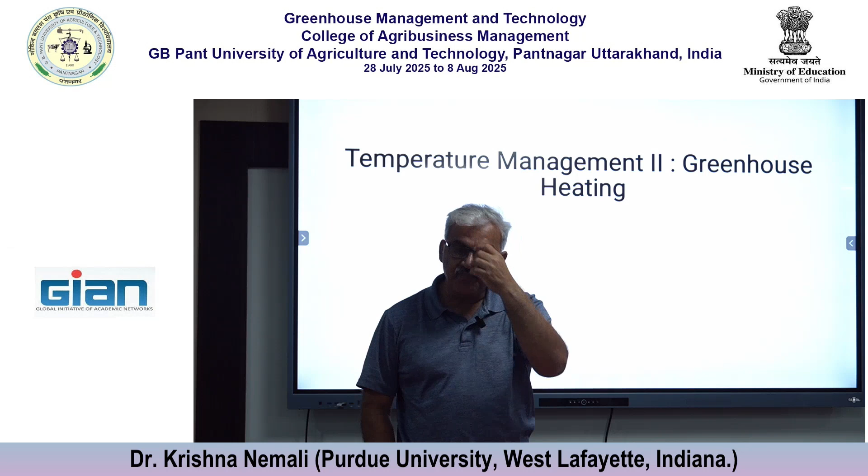Why don't you remind me the same question in the afternoon session? We might finish in the afternoon session, we may have 30 minutes, and we can talk about AI and how automation technology can really play a part. You're going to learn something, but let's park that question for the afternoon session so we can finish. I think we have everybody ready for this room, so let's start. But do ask me that.

Okay, so greenhouse heating, right? We talked about cooling. In some rare situations, you may have to heat a greenhouse, especially if you're up north, in Kashmir, let's say, or maybe in mountains and hills where it can get really cold, freezing cold, like 0 degrees Celsius in winter. I told you 25 degrees Celsius is optimum for crops.

Outside air is 0 degrees Celsius. Of course, the greenhouse will increase the temperature a little bit more than outside, but it's not going to bring it to 25 degrees. You may get 10 degrees Celsius in the greenhouse. That's not sufficient, right? 25 is what I'm trying to tell you is optimum.

So in such a situation, you may have to heat the greenhouse. If you are in an area with a lot of hilly regions and you build a greenhouse there, most likely you may have to heat it for at least a couple of months, maybe December and January, which will be pretty cold. So we're going to learn about heating. That's the reason why.

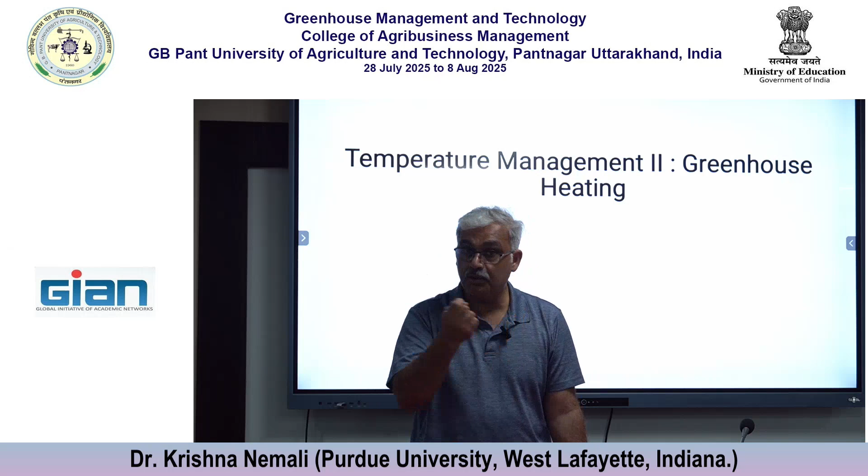But cooling is more important in India than heating. Most of the country is going to get hot, and that's why cooling is important. But we'll talk about heating, and also remind me about the humidity question you asked.

So let's look at this cartoon. Here is a greenhouse, and it's hot inside. Let's say it's 70 degrees Fahrenheit, 25 degrees Celsius, and outside it's 0 degrees Celsius, cold air outside. So the heat is going to be lost from the greenhouse to the ambient outside, because outside is colder than inside. The heat is lost through 4 methods: conduction, convection, radiation, and infiltration.

Now let's talk about them. Let's talk about convection. Convection is heat transfer through liquids and gases, fluids. Let's say you have a greenhouse, this is a warmer region and that's a colder region. The air is going to carry the heat from the warmer region to the colder region through convection, through gas, air. With time, everything becomes equalized. If you have a hot and a cold pocket, with time they all become similar. That is happening due to convection.

I told you the hot air rises up in a greenhouse. That's convection, natural convection, right? Hot air rises up.

There's an example. Let's say this is hot air here, and here is your greenhouse cover, the wall. The hot air comes in contact with the greenhouse cover. The cover is a solid material like polythene, glass, or polycarbonate. That material picks up the heat from the air, and then either the glass or polythene transfers the heat through the solid material to the outside. That is conduction.

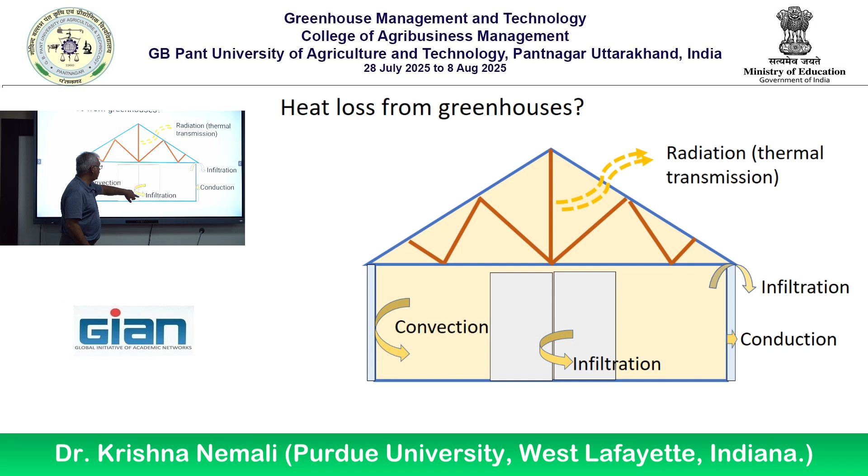So then the question comes: okay, we have to heat greenhouses. How much heat is needed? How much is it going to cost me? All of that - you can do mathematical calculations even for that.

So this rule of thumb is simple. How much heat is required? Heat required is equal to heat lost. I told you that heat is lost by 4 methods. What are those 4 methods?

Infiltration - if you can measure the total amount of heat lost by all these 4 methods, that's the heat lost, and you add back that heat lost to keep the temperature. So the temperature is 70, but these 4 methods made the heat go away from the greenhouse. So you know how much heat has been lost, you add back the heat, then you maintain 70. So heat required equals heat lost.

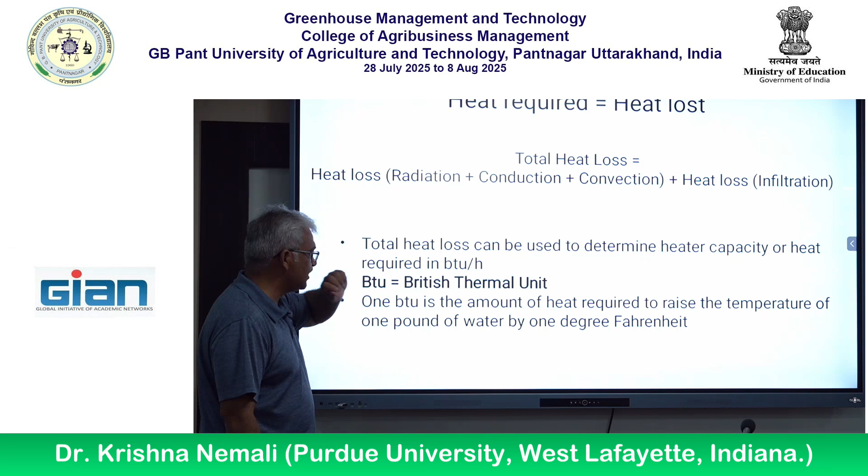Simple. So now we're going to do a simple calculation. Total heat loss coming from radiation, conduction, convection plus infiltration can be determined by a simple formula. Don't worry about this, I think this is an older slide deck. Yeah, let's get to here. I think this is where I got it.

So the total heat loss from all those 4 methods is Q. Let's say it's Q. All those 4 methods - conduction, convection, radiation, infiltration - is given by Q equals U times A times W times Ti minus To. It's a very simple formula, by the way. I'll explain everything slowly, but remember Q is the total heat loss. Once you know the heat loss, you know how much heat is required, right? So we are calculating heat loss as U times A times W times Ti minus To.

So what are these different letters? Let's start with Q. We know Q as total heat loss or heat required, in watts. U is the heat transfer coefficient.

Every material - polyethylene, glass or polycarbonate, whatever you use to cover the greenhouse - has a certain property. One of those is that heat transfer coefficient. That material is going to transfer these many watts of heat per meter square for a degree Celsius difference between inside and outside. That's what that means.

But you get these numbers - these are easy numbers, you get these numbers, you take that number and simply plug in there. You see here, U values - I've given you U values for glass, polyethylene, polycarbonate. So if your greenhouse is a polyethylene greenhouse, what do you take? 6.5. You take 6.5 and you put 6.5 here for U. Okay, that's easy.

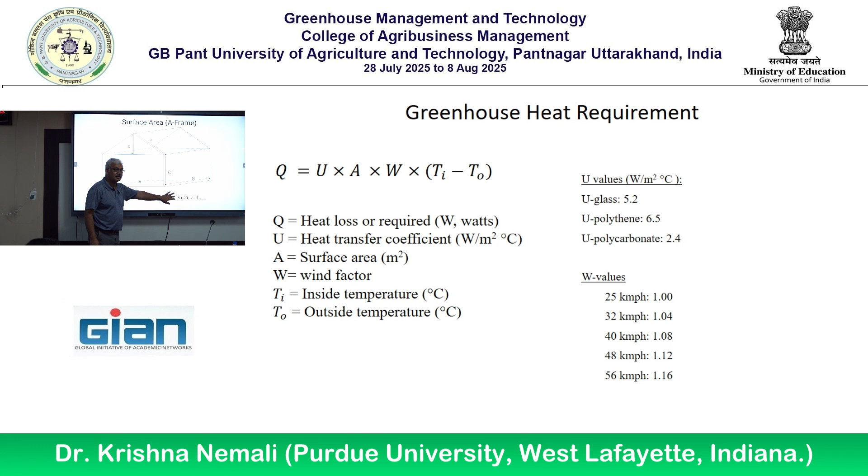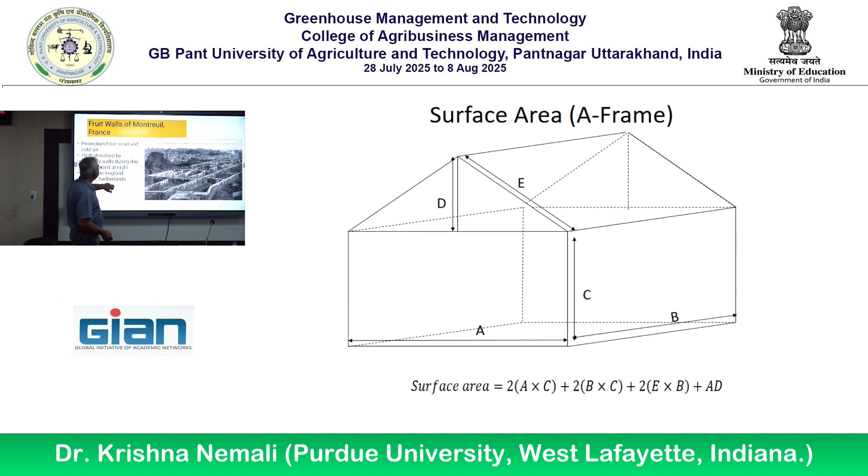I just want to move on. This isn't that important, but what I want to get to is this one. I know there's something wrong with it, but we'll get to that. In any case, this is how you heat a greenhouse.

Now you know how much heat you need. So why do you need to do that calculation? This is called a unit heater. You buy this from companies, and when you go to them and ask for a unit heater, they will ask you what the heat requirement is for your greenhouse. So you should have done your calculation beforehand, and you go to this person and say, I want a unit heater that generates this many watts of heat. So the recommendation is that...

You have to choose the worst case scenario for your situation. Meaning the TO, outside temperature, which is an important factor in that calculation, you should choose a day which has the lowest temperature for the year. Let's say January 31st is generally the lowest temperature for the entire year. You choose that temperature as the TO value, and you should choose 25 or something like that for the TI value, that's what you want to maintain inside the greenhouse. That's the worst case scenario, and then you calculate the heat requirement in watts.

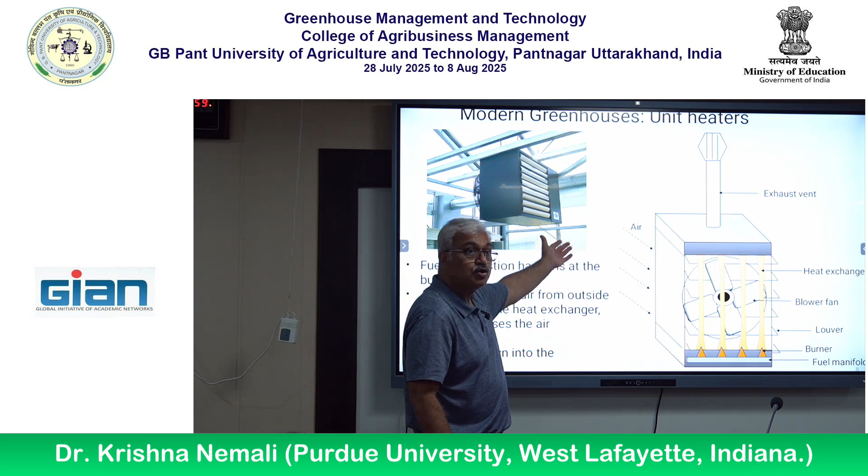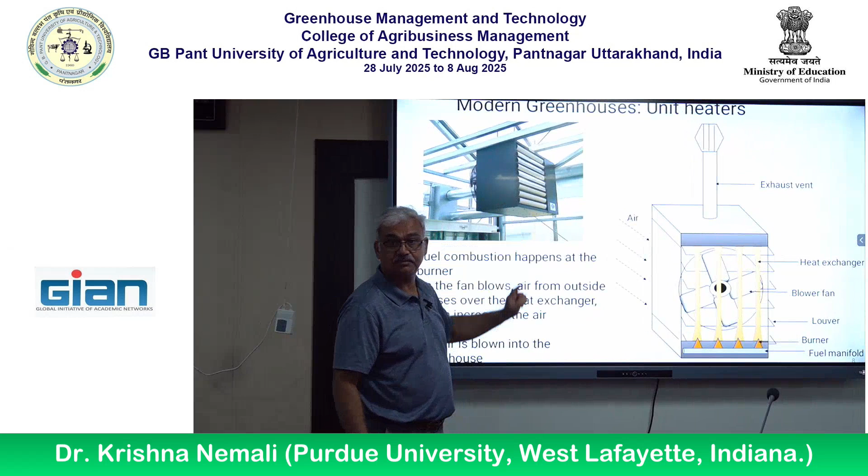You get a number, and then you go and ask the company to provide you a heater with that capacity, that many watts. Not simply something like pad area or fan capacity you've calculated - you should also calculate the heater capacity. That formula I gave you, Q equals U times A times TI minus TO, is mainly used for selecting the heater. You calculate the watts and go ask for the specific wattage.

The only consideration is that because you are buying a unit heater and this heater might stay with you for 10 years, you want to really pick the worst case scenario, the coldest day you will ever see, and that will be the TO value that you use. That way you are covered completely. There could be warmer days than that, but it's not going to go lower. So that's the reason why you should use your worst case situation for that.

So how does this heater work? The same heater, I'm showing you a cartoon here, that's how it looks. Inside you have a fan, and right below is a burner. The burner is like a stove, so we send fuel - it could be natural gas, gasoline, anything you can use. The fuel goes here, and these are burners. They flame, they light up, and the heat from the flame is sent into these heat exchanging elements. This is basically a metal rod, sort of in a line - you're looking at a transverse section, but think of it like a metal rod. The burners are there, and this entire sheet of metal is getting heated up.

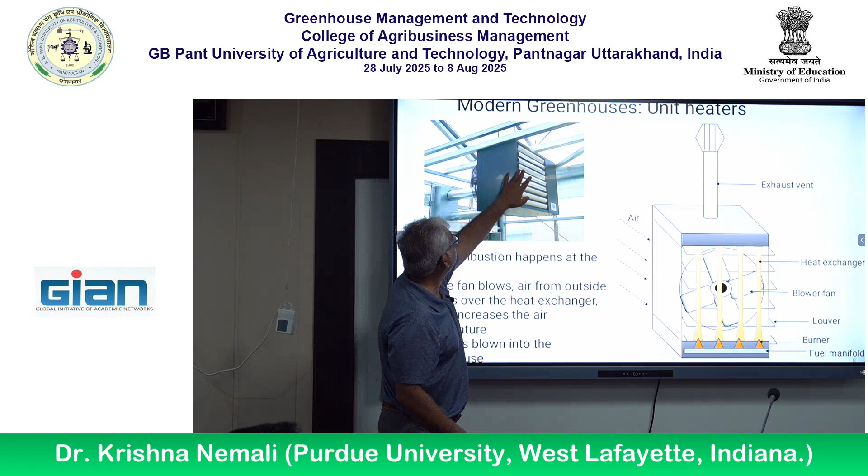The fan is pulling cold air from outside, and that air goes through these heat exchanging elements. As the air passes through them, the heat is picked up by the air, and then hot air gets into the greenhouse. Very simple mechanism, that's what this is. You see this one at the back, you see the fan here - the fan is pulling the air. Inside there is a burner element, the heat is generated inside, and hot air comes into the greenhouse. Very simple mechanism, any question on that, how that works?

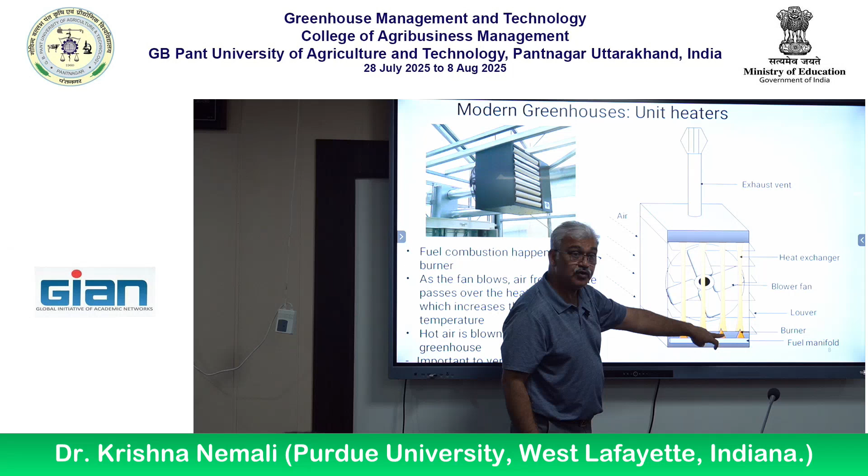The main thing is, you see this exhaust - when you are burning fuel, it's going to release a lot of gases that are not so good for plants. You have to make sure that exhaust is outside of the greenhouse. If you release that exhaust into the greenhouse, sometimes that may affect plant growth. So if you put the heater here, that exhaust should go outside, or take a tube and send it outside, not into the greenhouse. I've seen people using wood, and they burn wood to increase the heat, but with that wood, with smoke, there are a lot of other chemicals that you're releasing into the greenhouse that may not be good for plants. These are called artificially generating heat through unit heaters, and they're very common in greenhouses in northern latitudes.

So what is this louver? This is a louver, you see this? These are called louvers. They open when the fan is running, and they close automatically when the fan is not running. So louvers mean they're like fins - they open and close. When the fans come on, they automatically open, so the air goes through.

And the fan is turned off, they close. Okay, so what about the oil-filled radiators, which are also available in the market for heating purposes?

This will generally affect the carbon neutrality of the greenhouse and will be polluting the environment as well. So what are the better alternatives than this?

Well, you can use electricity, but again, end of the day, it all boils down to economics. You can use coils, you can use all kinds of elements, but end of the day, it boils down to economics. If they are not going to pay off, nobody's going to invest in them.

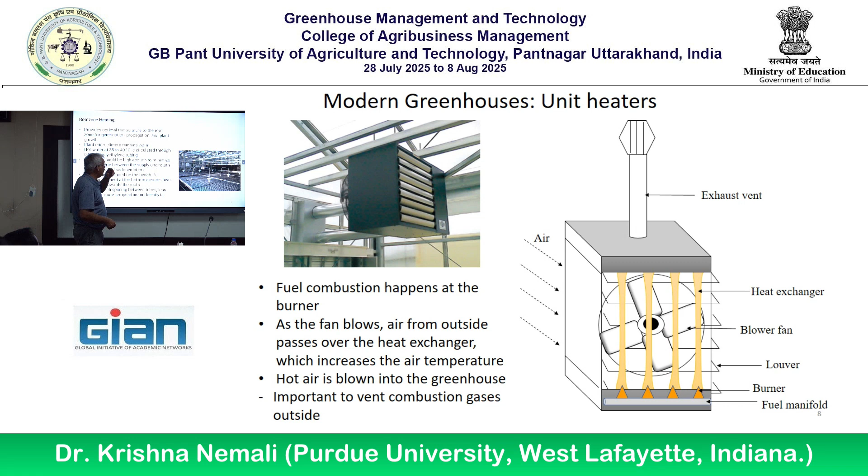So going back to your question, these are fossil fuels and we are burning them, so we are wasting, it's not good for the environment, things like that. Some other methods are there.

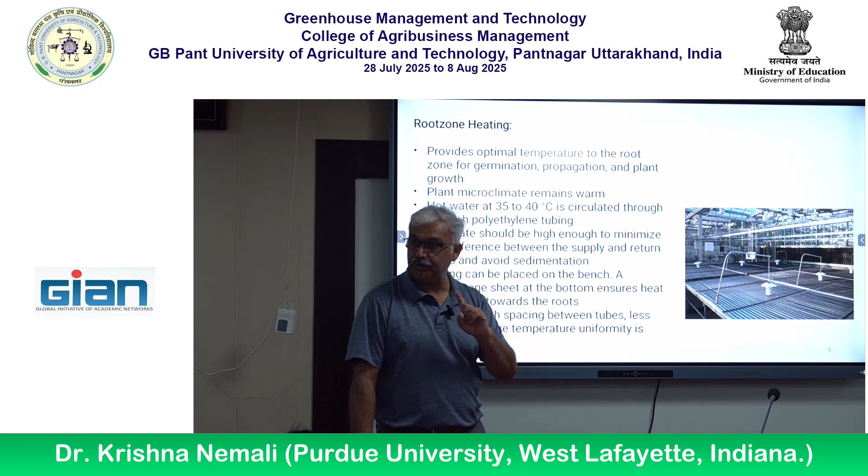So one of the methods is what we call root zone heating, bench heating. I think somebody asked about root zone heating too, right? So here is another example of root zone heating. In this case, what we do is, this is the greenhouse bench.

You can read this later, but I'm going to explain with this figure. Look at this picture, this is a greenhouse bench. We put styrofoam, what do you call styrofoam? Polystyrene is styrofoam, thermocol. That's what you call it. So those thermocol sheets are there, that's the white color material there.

Okay, and then what we do, we have these tubes. We're running hot water through those tubes. We're heating the water, but how do you heat the water? Maybe steam or maybe again natural gas, right? You can't escape from that. Okay, you may have a boiler, but you're heating water. At least you're reducing the amount of heat you will use in this case.

We run hot water and then we put plants on top of that. So what's happening is the heat energy is coming out of these tubes. It is bouncing back from that polystyrene, thermocol, styrofoam, and then it's getting onto the plant microclimate. So if you have small plants in pots, this system works very well.

You are not heating the greenhouse at all. You are keeping the greenhouse cooler, but you are maintaining a warm microclimate around the plant. That's enough, right? It is inconvenient to us, people who are working in the greenhouse, it will be cold inside, but maybe we're there for just 10-15 minutes. Plants are going to sit there all the time, so we just need to maintain their microclimate very well.

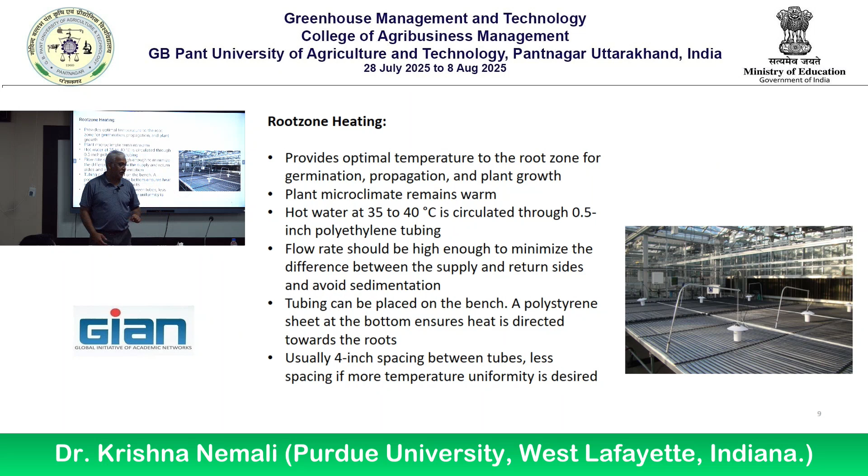That's again root zone heating. So heating the entire greenhouse is one concept using those unit heaters, but you are spending too much money on that. The entire greenhouse doesn't need to be warm. It's just that the microclimate surrounding the plant should be warm. That's what matters. So in order to achieve that microclimate heating, you can resort to root zone heating.

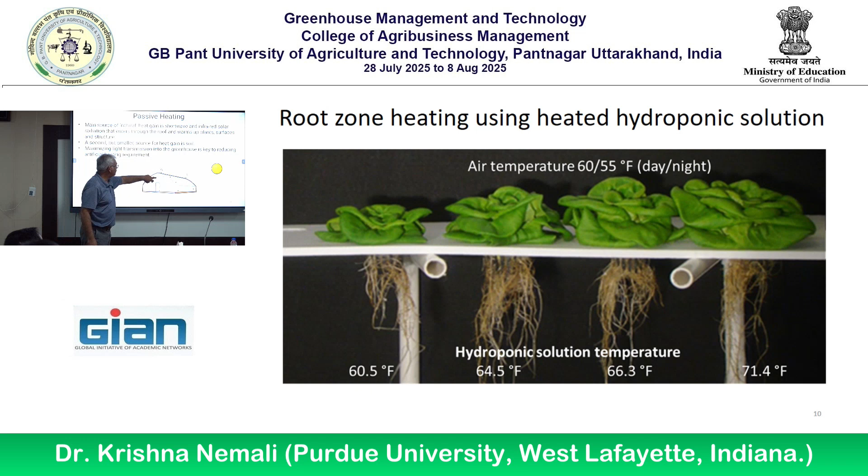I've shown you two examples: one is the water running through those tubes, and the other is in hydroponics itself. These two methods can work very well. There is another method, what we call passive heating. In this case, we are really being conservative. We don't want to burn natural gas or anything.

We don't want to burn fossil fuels, so we want to use what is naturally available. One thing is to position your greenhouse such that maximum light gets into it during the daytime. That light heats up everything and keeps the greenhouse warm for longer at night. So use the solar energy basically, and make sure the greenhouse receives maximum sunlight.

The length of the greenhouse should be in the direction of the sunlight in winter. That way most of the sunlight gets into the greenhouse and the entire greenhouse gets warmer. Here you are not investing in fuel or anything, you're just taking the naturally available sunlight. But this may be useful, but not too much.

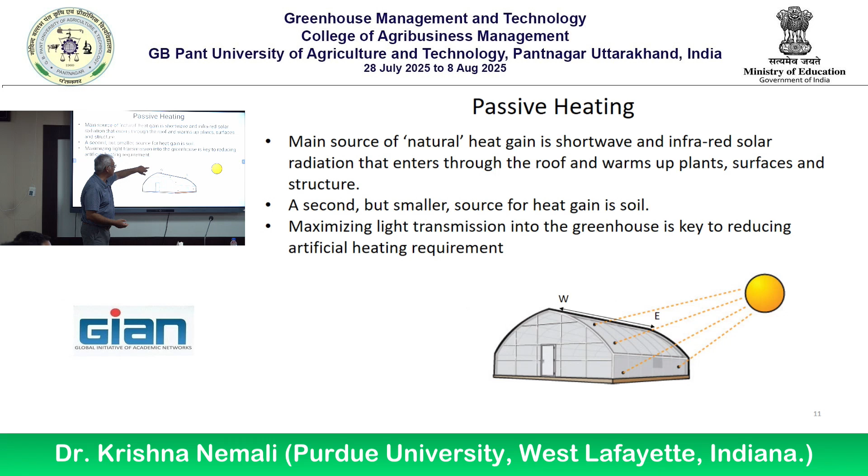So the greenhouse gets warmer during the daytime, and at night time they roll a blanket to cover the greenhouse, so the heat is not lost outside at night. They hold the heat inside. This is passive, not active - active means you're using fuel, heaters, things like that. It's a passive method, naturally using the available sun, and in doing so you are environmentally being responsible.

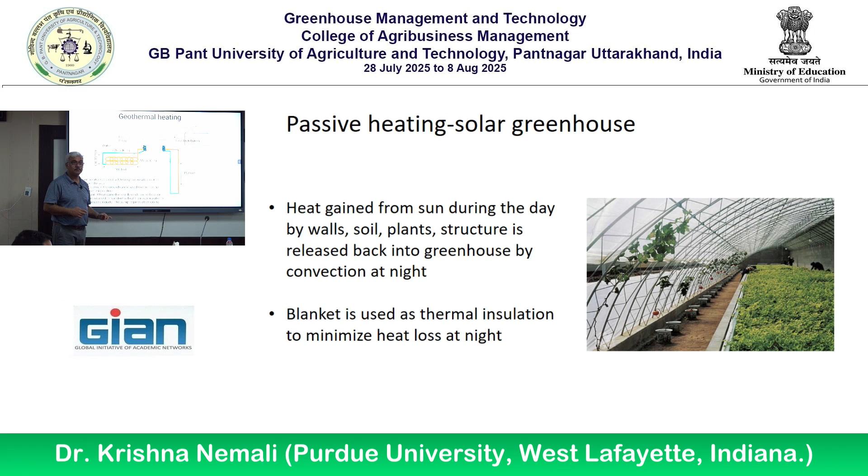There is one more method called geothermal heating. Some parts of the world, and in general, if you go deeper into the ground - for example 20 feet deeper - even in this part of the world, and measure the temperature at that depth, you will notice it remains pretty much similar throughout the year. In summer the air gets hot, in winter it goes down, but inside the ground at least 20 feet below, the temperature doesn't fluctuate like that.

It always remains similar. And what is that number? It's the average of winter and summer temperatures. So let's say in this region you have 90 degrees in summer, 50 degrees in winter. The average is 90 plus 50, 140, divided by 2, is 70 degrees. So the ground below at 20 feet will always remain close to 70 degrees Fahrenheit. Now you have a winter which is 50 degrees Fahrenheit, but the ground is at 70 degrees.

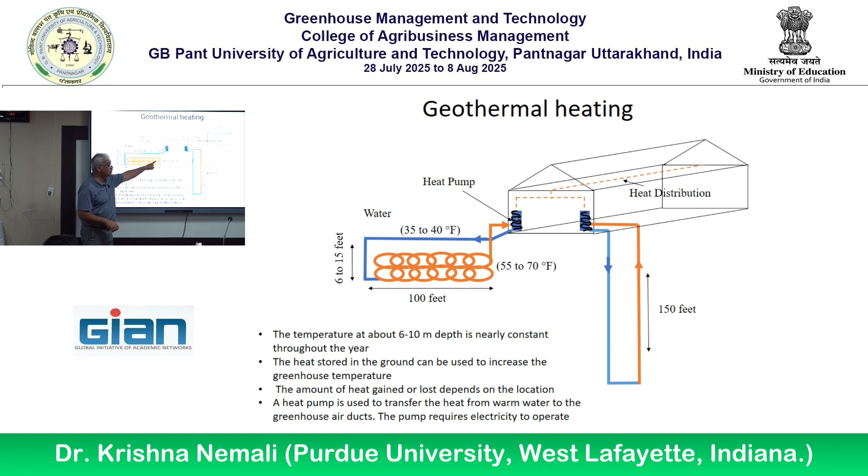Why not tap that heat? Why not pull that heat in the ground and bring it into the greenhouse? That is called geothermal heating. So what do they do for that? They dig holes around the greenhouse, put coils at 20 feet depth, and blow cold air from the greenhouse. As the air goes through those coils at 20 feet depth, the coils pick up heat from the ground, the air gets heated up, and the hot air comes back into the greenhouse.

So you're now not relying on natural gas or fuels or anything - you are tapping into the heat already stored in the ground. The other method is to go really deep into the ground, 150, 200 feet. As you go deeper and deeper, it gets hotter and hotter. So you can send a coil down, cool air goes inside, and the air coming back picks up heat from the ground, and you get hot air back into the greenhouse.

That's geothermal, basically. So you have geothermal and passive methods, which don't use natural gas and are very environmentally responsible. You've got to do some investment for that, but those methods are also being used. But for most commercial operations in the northern latitudes, heaters, unit heaters are what we use, and for that you have to burn fuel - natural gas, oils, gasoline, things like that.

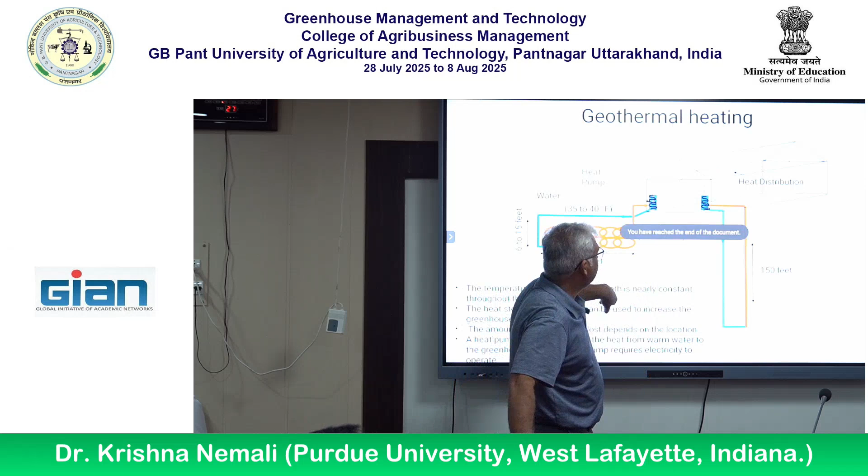I think this is the last slide. Yeah, this is the last slide. Yeah, we're right on time too.

So again, I kept the heating piece minimal, but I'll get back to your question in a second. I kept it minimal because it's probably not quite common here. The cooling is the most important thing in this area, so I want you to know everything about cooling - fan specifications, pad specifications, and considerations of where to keep fans, where to keep pads, the distance and things - all of that very important.

So remember those things, okay?

When you try to cool the greenhouses, and you asked about humidity and how to deal with that, the best way is ventilation. You have to continuously run the fans in summer, getting humid air inside because of the evaporative cooling, but you're also exhausting that humid air outside. So continuously you're venting out and bringing air from outside to inside, but that air humidity is going up at the pad area because it's getting exchanged with water. So humid air comes inside, but you're venting it out too.

So probably you will maintain whatever the humidity is outside also inside in this situation. But if the outside humidity is high and is causing a problem, you have to go for dehumidifiers. These are machines you keep in the greenhouse. They basically condense the water through cooling. When you cool something, the water condenses like rain, like when the air gets to dew point, it rains. Just like that, dehumidifiers cool the air, condense the water, collect it, and you can reuse that water. This option is there, but it's not common in greenhouses, it's more common in vertical farms, indoor farms. I've seen companies use these dehumidifiers to cool the air and condense the water out, because inside a building it can get really humid.

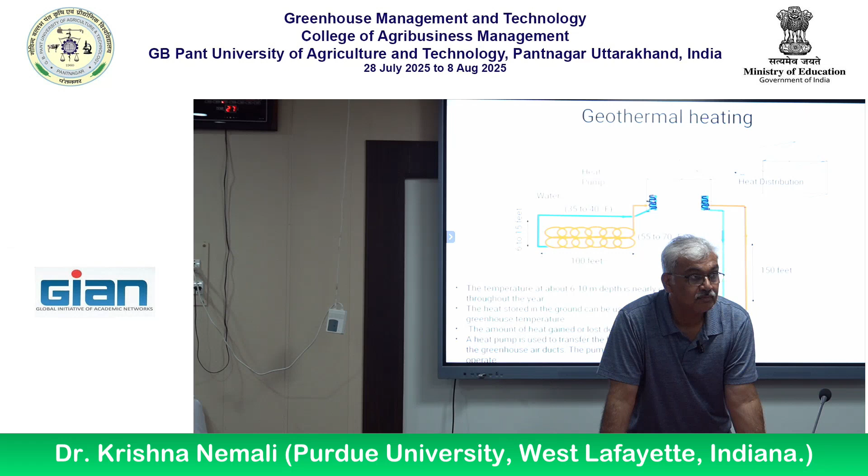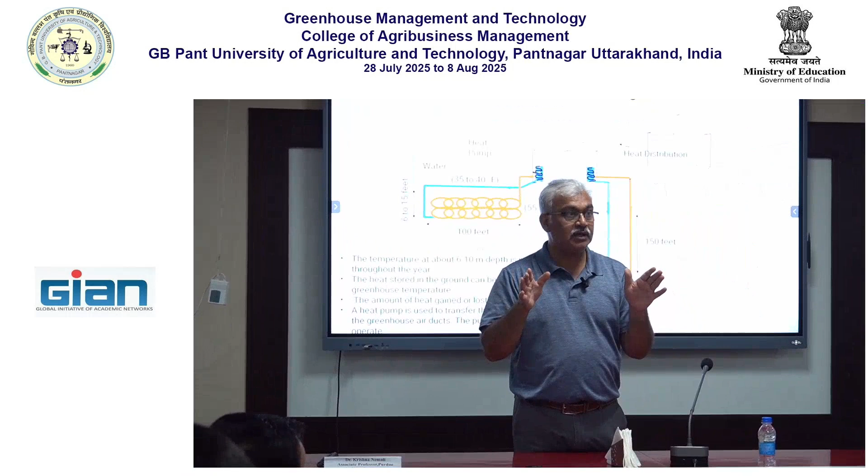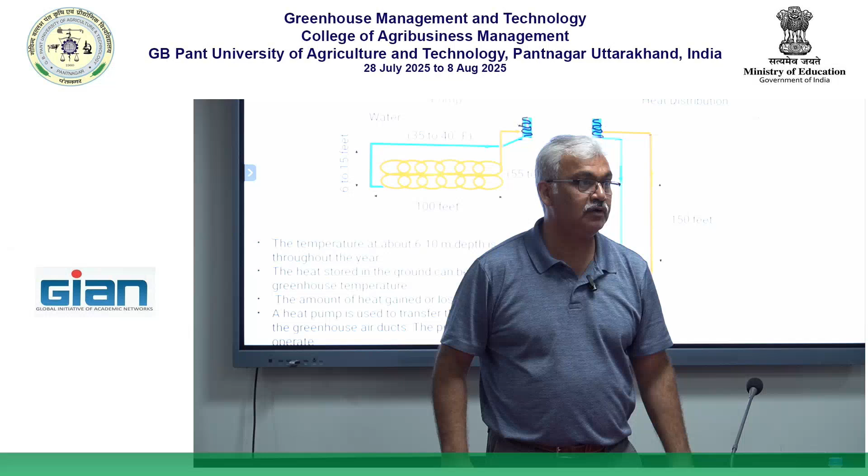Now we're talking about the effects of humidity on plants. Unlike temperature or light, there is a broad range of humidity, relative humidity, with a very similar effect on plants. For example, if the relative humidity is between 35% to 65%, plant growth is pretty flat, there's not much influence. Photosynthesis is flat. If you plot a graph with photosynthesis on the y-axis and humidity on the x-axis, 0 to 100% relative humidity, the graph looks like this: photosynthesis remains flat at a broad range of humidity and then goes down. So as long as you are in that 35 to 65%, you don't have to worry too much, number one.

But then if you go above that, one of the major problems you'll encounter is the pest problem. Insects' propagation goes up - the high humidity and temperature will favor their growth, so they multiply rapidly. Bacteria also multiplies rapidly, so that problem is there.

At the lower humidity range, it's a very similar situation to drought stress. When the air is really dry, the transpiration increases rapidly. Transpiration is directly proportional to vapor pressure deficit, and vapor pressure deficit is inversely proportional to relative humidity. So when humidity is lower, you're forcing the plants to take up more water and lose it through the stomata. But if the soil doesn't have water, you're creating a drought scenario for the plants. So lower humidity is more like drought. Between 35 to 65%, not much of an effect. Beyond 65%, you start seeing bacterial and pathogen related issues. That's how humidity affects plant growth in general.

But how do you get the humidity out? By ventilation, by dehumidifiers, things like that - you can take care of that. Okay, so that's important. Good.